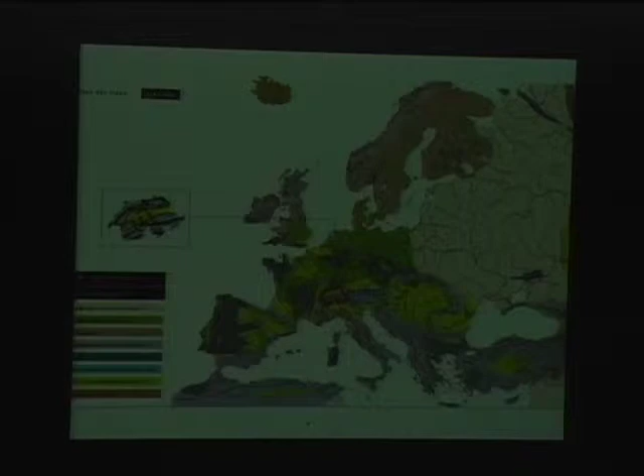In between is also a state of being for the Swiss and their landscape. Dorothee Imbert rightly referred to this in her introduction to the conference and exhibition on constructing the Swiss landscape here at the GSD last December. Switzerland, an island in Europe surrounded by a sea of recently united countries, embodies this condition. Within its borders, extreme contrasts of geology, geography, landscapes, history, culture, and traditions collide and exist within hyper-close proximity. This encounter of extremes, especially in the landscape, provides an obvious richness while heightening one's awareness and appreciation of the polarities.

Ours is an isolated yet mobile office. Its base is located in the Swiss Alps at an altitude of 3,000 feet in the parsonage of Rougemont, a small village of about 960 people, to which we feel proud to have added 3 more. As an antidote to this remoteness, we have developed a migratory pattern which in 6 hours travel places us in the center of Barcelona, Spain, a city of 3 million people.

We're a small satellite office, our outpost, used intermittently, allows us to follow our Spanish work. This large-scale commute, 4 to 6 times a year, also offers a geographical and cultural shift which inevitably catalyzes new thoughts and inspirations. These are our images of our rural Swiss studio and our urban Barcelona antenna.

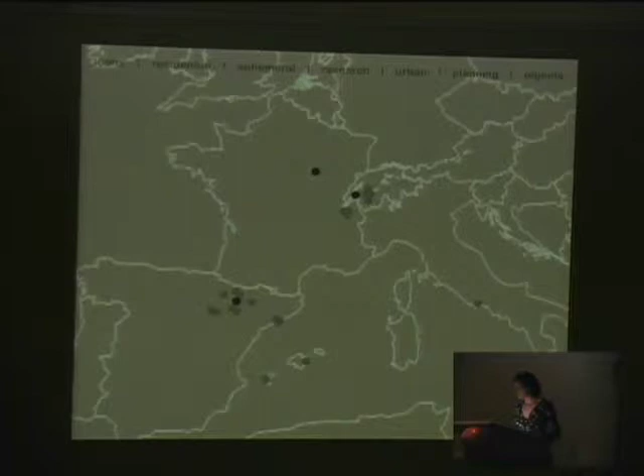These two projects bracket the dozen years we're talking about: the redesign of the ground plane of Corbusier's Unité d'Habitation on the left, done in collaboration with Bruno Reichlin, was at the beginning of our practice, and the interior renovation of the Château-d'Œx church on the right was inaugurated just two weeks ago.

One is a controversial 20th century modern emblem, the other a village church built on the ruins of an early medieval fortress. In both cases, we responded to a building which carries iconic status within a community because of the cultural, social, and emotional baggage associated with its presence, its use and reuse, as well as its symbolic value.

We will present the project of La Cité Radieuse in greater detail in the later part of this talk. Now I'll briefly describe the church, and this is the window I'll be referring to in the next slide.

The intervention in the Château-d'Œx church was sparked by the parish's initiative to invest in a new organ. The western part of the church, shown here before construction, needed to be modified in order to accommodate the height and weight of the new instrument.

This was an opportunity to improve certain spatial issues. The existing window in the western facade of the church, which we saw earlier from the outside, was entirely obliterated by the organ, which was backed up to it.

The back of the church was dark, and the three existing pillars impaired visibility. The connection between the two upper levels was rather ungraceful.

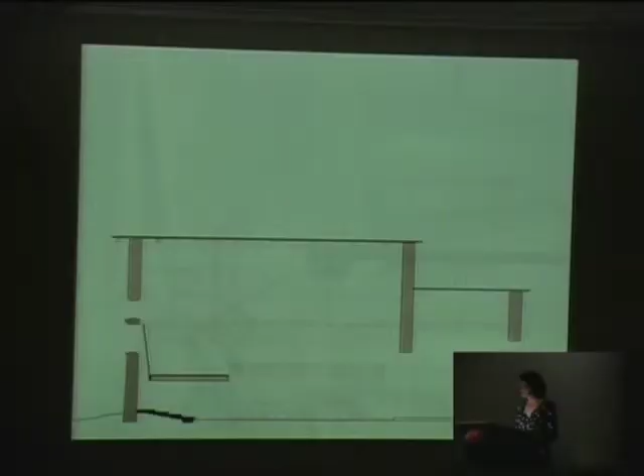Here's the section showing the light, the window and the inclined plane. Here are the stairs and the railing details.

The railing presents the most expressive face of the project. It sets up a dialogue between past and present, as it is inspired by the traditional craft of cut-out planks. The undulation of the surface gives a differentiated perspective depending on the point of view, sober or silent at times, and rippling or even sensual at others.

Residential. Over the years, we've undertaken more than 30 small-scale residential projects, single-family house or apartment renovations, as well as the design of private gardens.

Here we will show you one of our most recent residential gardens located along the lake edge near Geneva. This garden for a new house on the southern edge of Lake Léman was commissioned by the architect designing the house.

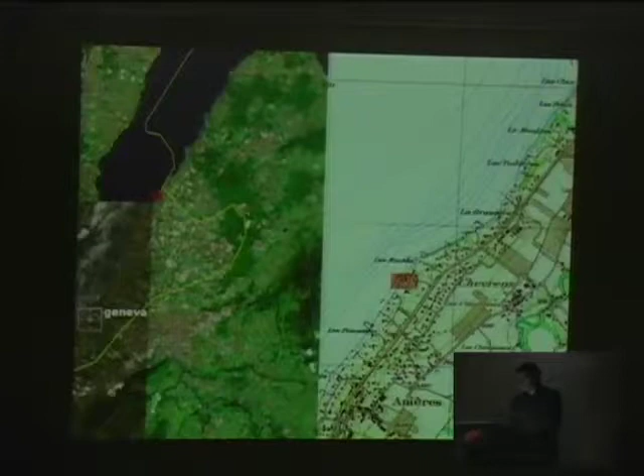She and her husband asked us to design a garden that would accompany her project and resolve some of the site-specific difficulties. The sloping site and the construction of a new house provide the topographic framework for this garden.

The garden responds to the quadrants that the house sets up. To the east, an orchard frames the entry drive.

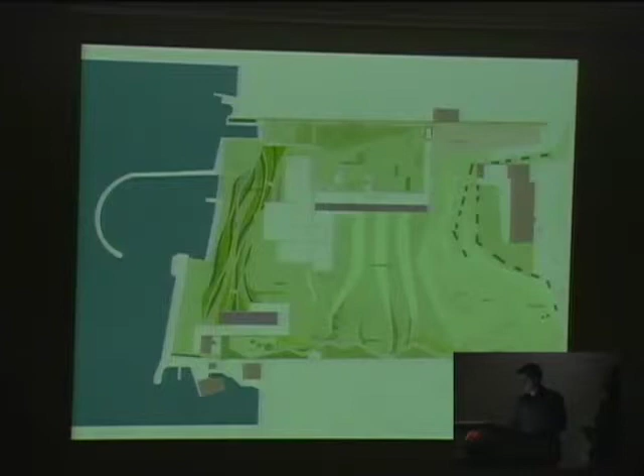To the north of the entry passage and reflecting pool, we designed a garden of drawers. To the south, a field of waves ties into a woodland edge, and between the house and lake, a planted slope. These different treatments of the ground plane in these four quadrants help to structure the garden.

Section A cuts through the drawer garden and cantilevered end of the house. The drawers relate to the more private rooms of the house. Section B cuts through the orchard, field of waves, and swimming pool.

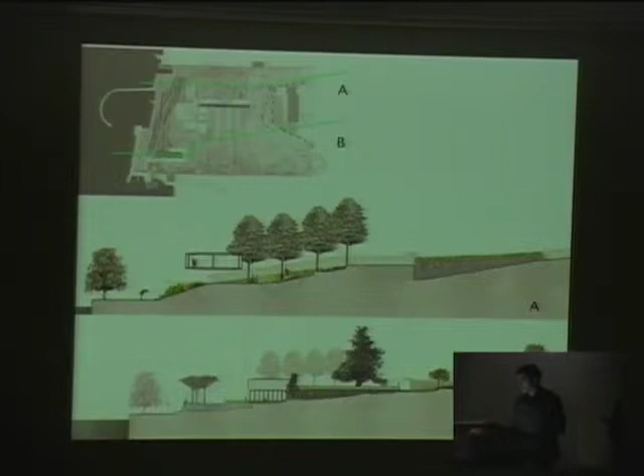The orchard on the highest edge of the garden is composed of a variety of antique apple species. This mass helps screen the neighboring house and operates as an entry percolator to the field of waves.

A square slope is enclosed by the house's cantilever, an entry bridge, and an existing line of linden trees. Seven large corten steel drawers are inserted into this green bank as plant containers. They're filled with aromatics, ferns, and large leaf perennials.

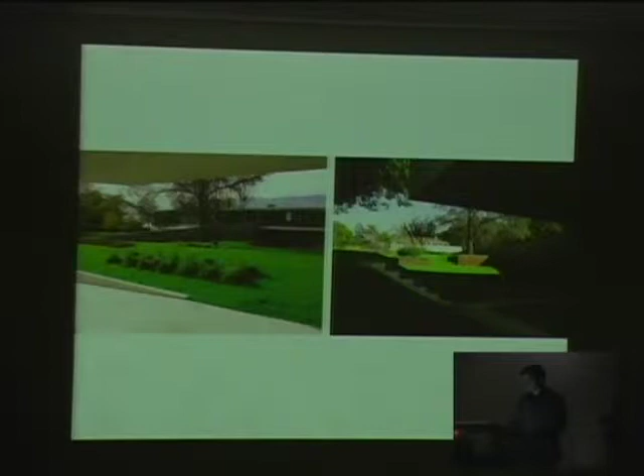The field of waves extends up from the kitchen terrace to the orchard, undulating along the neck of the house. The water's edge acts as a starting plane of a series of successive vegetative undulations which roll up the slope, flatten out around the house, and then continue along the site.

This heavily planted slope along the lake poses as the garden's primary formal piece. Ironically, it falls away from the house and is best seen from the water.

As in many classical French gardens found in the French-speaking world, the primary vegetative structure is composed of boxwood hedges. We've added a twist: grassy striations fill the voids of this boxwood fabric, and an assemblage of paths and linking stairs offer access to and from the lake.

The stabilized gravel paths slip between the ornamental grasses and the boxwood striations, while also allowing for easier access to the lake edge. Two pines were added to an existing one in order to help filter the reflecting sun as it sets across the lake.

The result is a contrast between the sober rectilinear geometry of the house placed within another new formal language, that of the water, the earth, and the plants.

Ephemeral work. We enjoy working on ephemeral installations, partly because it allows us to explore the margins between fields that we're interested in. We will overview two pieces, Garden of Silence and Field of 100 Pickets.

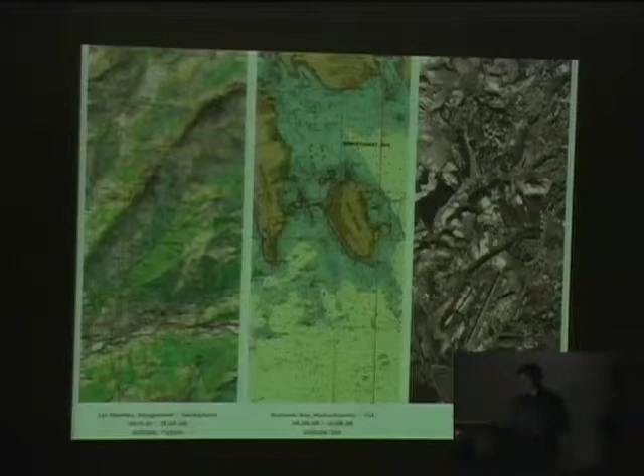Outside Rome. During a year at the American Academy in Rome, I studied the landscape of post-war collective housing projects built on the Roman periphery. In search of space, light, air, and low land costs, Rome's post-war collective housing projects were pushed far away from the center and into the broad threshold between the historic city and the agricultural countryside.

The relationship of the dwelling to its urban condition, to society, and to the land changed radically in this new marginal situation. Although new housing typologies ensued from extensive experimentation, their subsequent landscapes remain remarkably understudied and undesigned.

Neither public nor private, neither park, square, nor garden, ambiguity has left many of these residual spaces unappropriated and lost. Still commonly lacking a resolution of vision, program, ownership, and identification, the landscape of housing in peripheral Rome demands greater attention.

Terragrams, Delivering the Landscape. Terragram presents a series of interviews that open dialogue on the integral and all too often invisible role that landscape architecture plays in our lives. A first-hand conversation with the people who are making, designing, and thinking about our constructed landscapes.

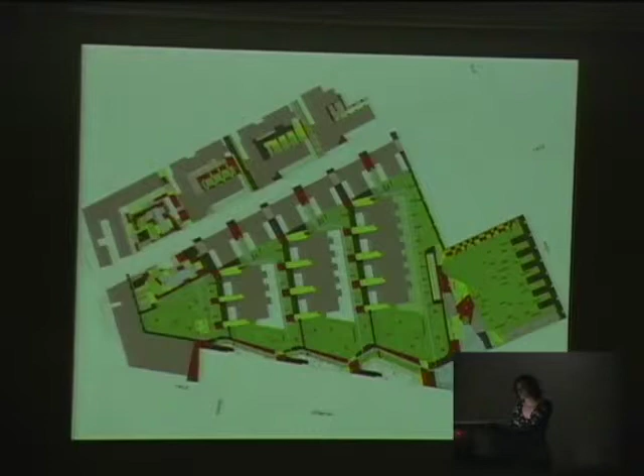To the east, we were able to preserve a pre-existing grove of trees, which now stands slightly raised above a hedge garden. This is the main entrance from the city. Finally, an interstitial terrain is sculpted into green terraces and terminates in a bosque of almond trees.

These earth forms make reference to the local agrarian tradition of lightly leveling fields to facilitate pasture, planting, and irrigation.

The different zones created by this terracing reinforce the zigzag path and frame the children's play spaces, while also shifting the concentration of activity away from the attached houses. The hills, which are as high as 8 feet, allow for multiple perspectives and greater spatial definition to this zone.

These landforms extend the effect of the volumetric stepping down, which we can see in the massing of the housing, denser and higher in the rear of the image and lower in the midground. Between the zigzag path and the row houses, the grass terraces create a modulated landscape, a solid rather than a void in terms of spatial identity, inscribing it as one of the park's most identifiable parts.

We also can see the end of the passageways that feed the row houses. All houses are served by a common underground garage. The passages, therefore, allow mostly pedestrian access between the main entries to the left and the garden entries to the right. This space is intended to be appropriated by its inhabitants.

Each passage has a line of trees of a different species. The colored bands on the street correspond with collective entrances and small sitting zones. We insisted upon qualifying the garden entrance as though it might be used regularly.

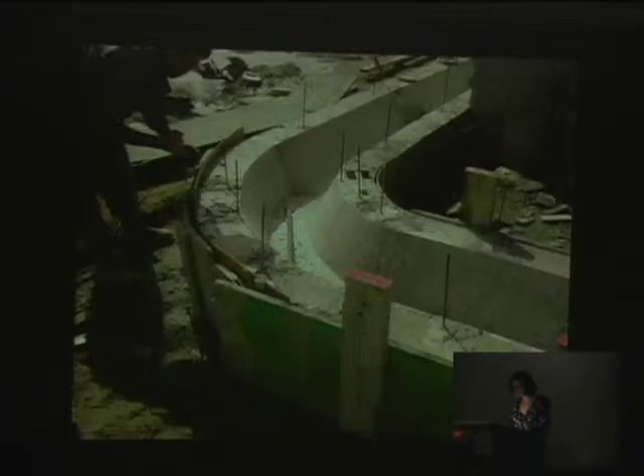The canal system was designed to be composed of prefabricated concrete modules, but in the end it was decided to have it poured in place. The final quality is not perfect, but satisfactory given the park's construction budget.

At three of the four sources, we have designed simple boxes to serve as fountains. They are made of Corten steel.

Completing the system, here's the basin which anchors the park at the main plaza. The bottom of the basin is filled with river stones and a few sunken planting circles for water lilies. The edge becomes a place to sit. The water is also used to irrigate the garden.

At night, light boxes illuminate the outer edge of the park and basin, thus bringing some life to the imposed perimeter wall separating the park from the school.

At the heart of the park, three elements come together: the basin, the plaza, and the bosque of pre-existing ailanthus trees. This zone becomes the threshold between the hedge garden and the zigzag path, which reaches into the park's interior.

Along the rear wall of the park are short segments painted red. Here, despite the client's reluctance, we sited doors which were to be punctured into the schoolyard. Regularly disregarded during the design and construction process, we're happy to notice that they have now been constructed.

And these doors are now gateways to roundabout detours for the children as they walk from one class period to the next.

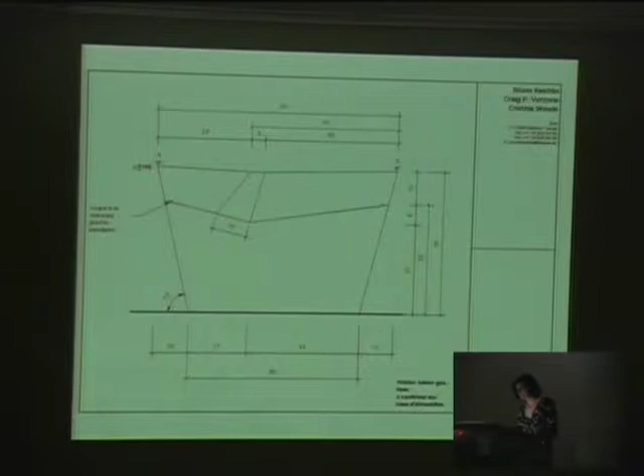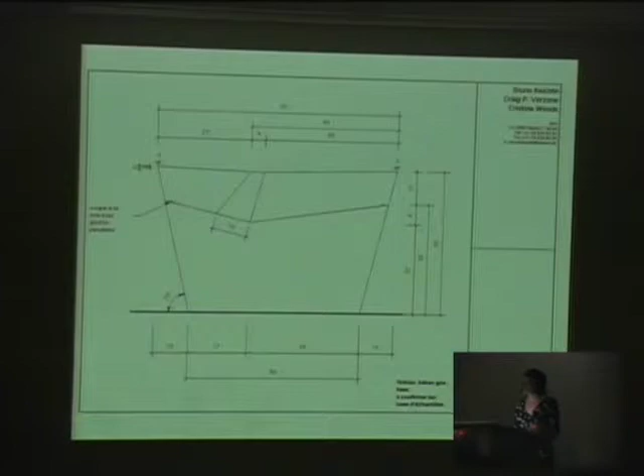The Cité bench. Finally, this concrete bench was designed for the Cité project. It's based on Le Corbusier's Modulor, and its design allows for double-sided yet oriented use, since the slots are not centered, and this makes the depth and inclination of the seat perceptibly different on either side. The slots allow for water to drain from above and for indirect light to shine through from below, when the bench is combined with a floor projector.

The benches can be installed individually or as a series of increments. After the Cité project was realized, the Barcelona company Escofet decided to commercialize it.

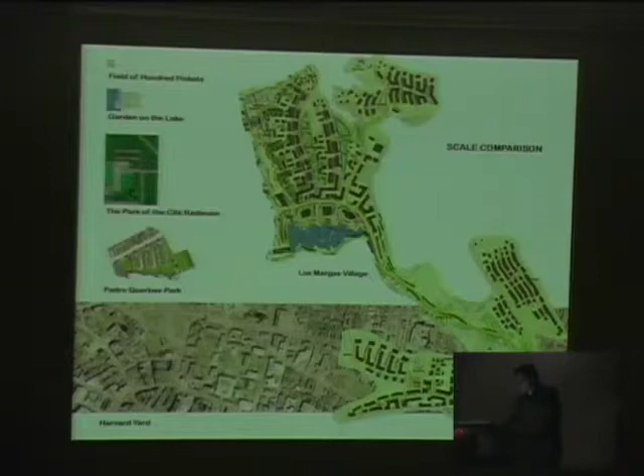And this brings us to the end of the flyover. The diversity of scales at which we practice is one of the fundamental flaws of our studio, if one thinks purely in terms of efficiency. However, it's one of the reasons why we enjoy our practice, and we find it keeps our minds nimbler. So we accept it as a chosen flaw, of which there are quite a few.

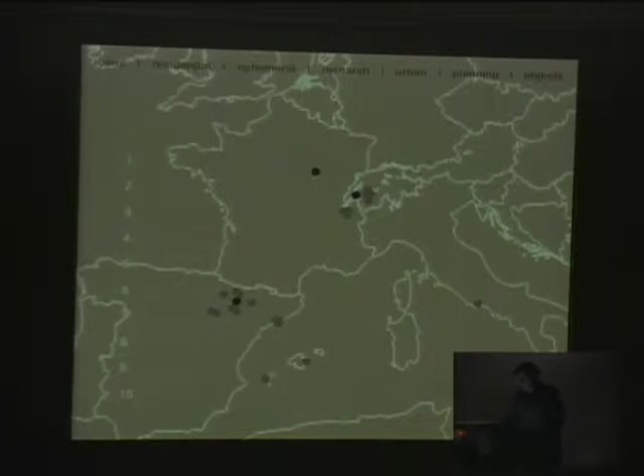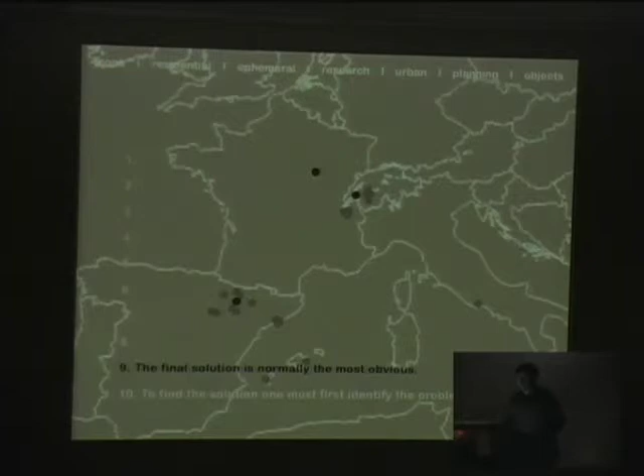Before delving into 3 projects in greater detail, we'd like to submit to you a few thoughts. So here are our top 10. To find the solution, one must first identify the problem. The final solution is normally the most obvious. The most beautiful ideas are the unexpected ones. Number 7, fine craftsmanship is nice, but not necessary.

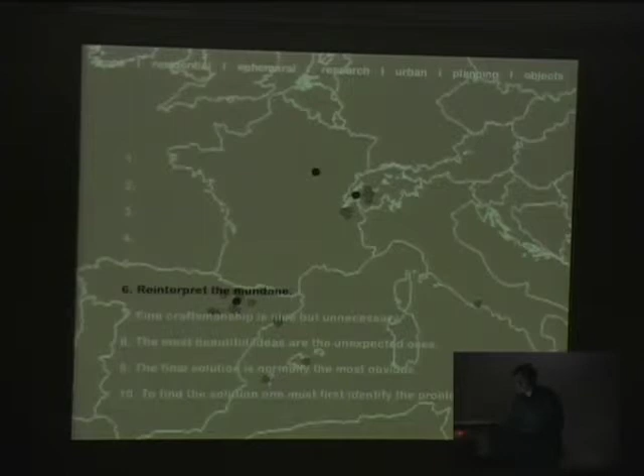Reinterpret the mundane, design between abstract and figuration, start with the ground plane. Coming in at number 3, a plan is meaningless without its details. Landscape and architecture are reciprocal pursuits. And finally, number 1 of the VW Top 10, practice is trial and error.

But as in much of what we do, we could not just stick to 10, so here are a couple extras. 11, every project needs an inside advocate. 12, choose your battles. And finally, 13, there's only so much you can do from a distance.

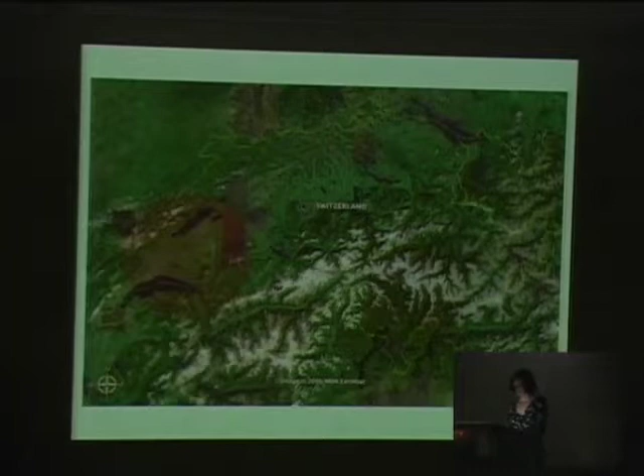Okay, now we'll show you Cadrage, a landscape master plan for the Canton of Vaud, Switzerland. Switzerland is composed of 23 cantons. The Canton of Vaud lies in the western French-speaking region. It borders the Canton of Geneva, France, and the cantons of Neuchâtel, Fribourg, Berne, and Valais. It presents a sampling of the 3 main geomorphological components of the country: the Jura mountain range to the west, the Moyen Pays or plateau in the center, and the Alps to the east.

The canton is in the process of revising its master plan and decided for the first time to commission a landscape study focused on the territory's rural landscape, embracing close to 3,000 square kilometers and a range in altitude of almost 3,000 meters. We put together and piloted a team composed of a historian, a geographer, an agronomist, another landscape architect, a photographer, the graphic designers at Actar, and our office. The purpose of the study was to assess the current state and diversity of landscapes and to anticipate the major issues confronting the evolution of the landscape in the next generation. The final report was structured into 4 booklets, which could be velcroed into a sleeve in 2 different ways.

This diagram of the report shows the various parts of the study. We'll go over them part by part.

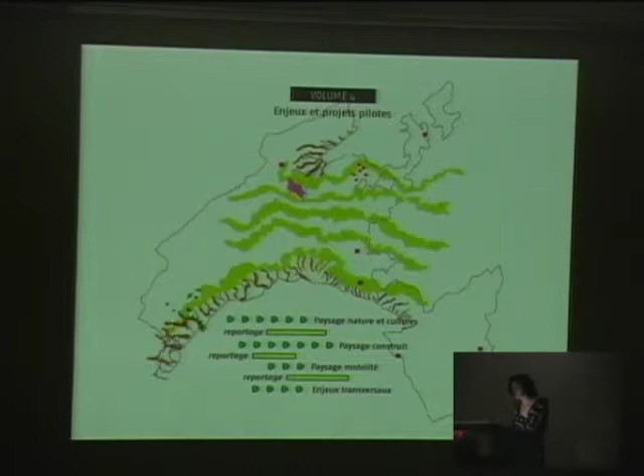Drifting across the territory, collecting first-hand observations, and the identification of 24 landscapes of reference in Volume 1. The creation of a palette of landscape typologies in Volume 2. Volume 3 presents and carries a DVD of films made by the photographer. And all of these led to Volume 4, identifying the challenges of the future and addressing them through some pilot projects. These 4 volumes cross-reference one another and are meant to be used in conjunction, hence the binding concept, which allows all 4 to open up at once.

Volume 1, Existing Conditions. So as to highlight the evolution, or lack thereof in certain cases, the photographer collected old postcards from the early 20th century and returned to the same spots to get the identical point of view. Here's another example.

Then, drifting. This shows the route of our team's drifting and gathering process. We gave a 12-year-old the task of mapping out roads of varying typologies from highways down to unpaved lanes, and of determining our stops randomly every 10 kilometers at these locations. We collected information.

Photographic panoramas as well as collective sketches. These were created by layering onto the same drawing the components of the landscape, topography, water, buildings, and vegetation, captured in sequence by different people, an exquisite corpse of sorts. I owe this idea to Carol Bolsay, who taught me so much at the Carpenter Center and at the GSD many years ago.

These sketches are shown here, interjected between the photographic documentation, and the contrast between what the camera captures and what eyes and hands record is at times quite poignant.

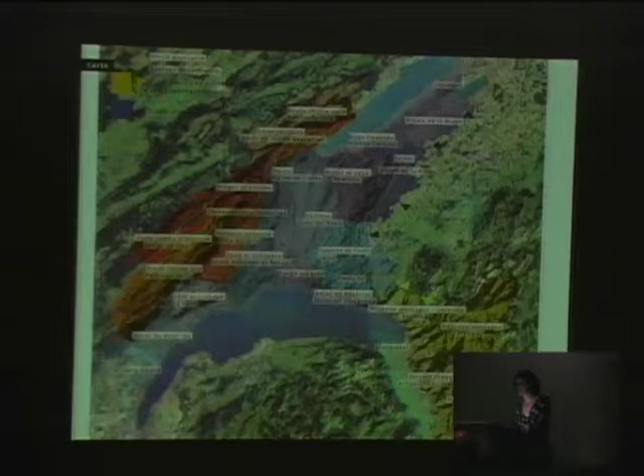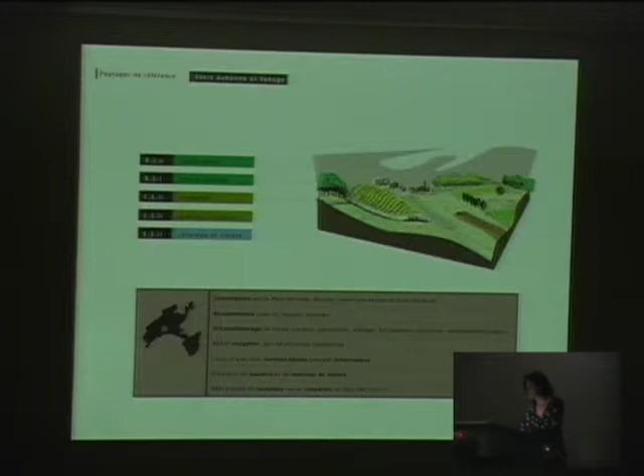Each landscape of reference was presented as follows: a diagram cross-referencing to the palette of typologies relative to its components, a locator map and a list of salient characteristics of this specific landscape, then a representative image and some of those collective sketches, some more images, and a text by the historian about how this landscape came to be, and by the agronomist about how it is currently managed. Finally, an ideogram summarized in a more interpretive manner the qualities of this specific landscape.

Here is a second example in the Jura region, just to give you a sense. And there are 24 of these.

Volume 2, Landscape Typologies. This shows the organization and color coding of the palette of landscape typologies by classification into 7 deliberately non-scientific categories: rock, water, grasslands, trees, agriculture, human habitation, and infrastructure.

The identification of the typologies was done from a purely empirical point of view, avoiding professional jargon from any field as much as possible. It's based on the observation of the aerial photograph and the ability for non-specialists to discern the type of landscape in question at a scale of 1 to 10,000, since each image represents a 1 kilometer square.

At the center, the extracted aerial image. To its left, a doctored image, graphically highlighting its essence. To its right, a probable locator icon, the title and main characteristics of the type relative to fauna and flora, water, constructions, infrastructure, and uses. And finally, the code and name of the type.

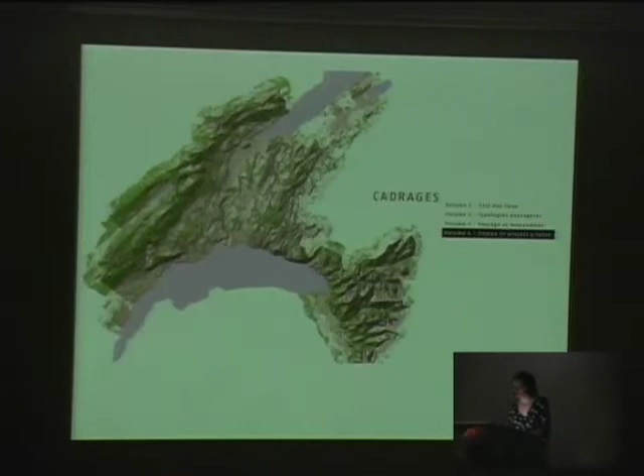This brings us to Volume 4, which focused on issues and pilot projects. Here's a preliminary mapping of the landscape issues we addressed.

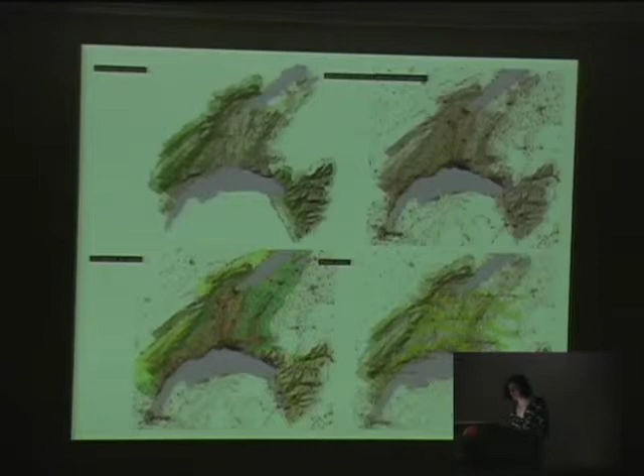Here's an example of those questions which serve as springboards to pilot projects. What if the rural landscape remained open and diverse? Encourage transversal swaths across the plateau. What if the lake edge landscapes remained connected to their backcountry? Maintain landscape swaths so as to frame urban development.

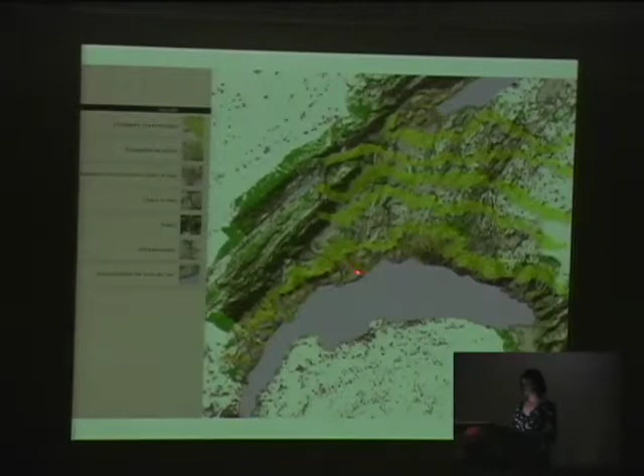This shows the transversal swaths in yellow across the plateau and the smaller scale lake edge ones in orange on the Lake Léman to the south and Lac de Neuchâtel to the north. The process by which we identified the strategy includes, on the left, locating the existing villages and threading a swath in yellow across the more open areas. On the right, deducing the areas where densification through urbanization or reforestation is favored.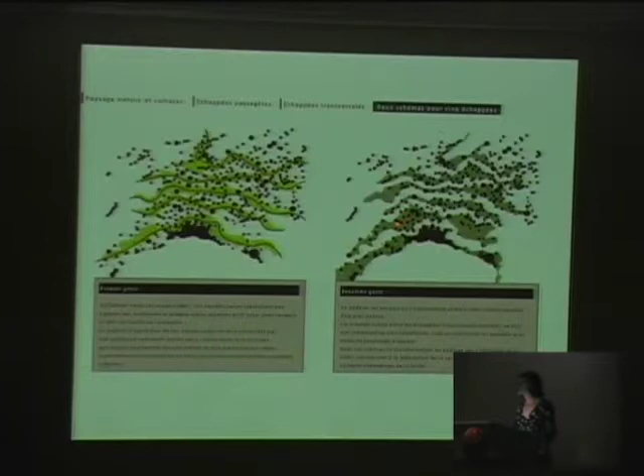To consider the implementation of this planning strategy, we studied this test patch, highlighting the critical components which impact the process or become primary actors in perpetuating the openness and vitality of the landscape swath: villages, orchards, isolated farms, road and rail lines, bridges, paths, waterways, wetlands, forest patches, etc.

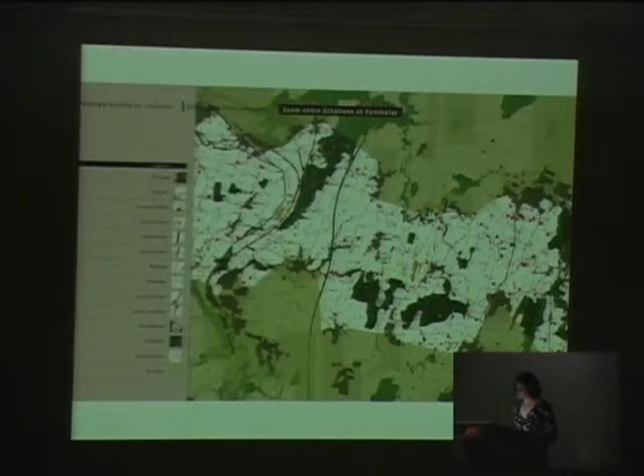For the lake edge swaths, we proposed a 4-part strategy, which includes protecting the primary landscape components, restitching the pedestrian connections, articulating the edges, and densifying development around the swath.

What if 2 separate but adjacent towns coordinated their growth? Qualify the meeting ground of their peripheries through landscape intervention and urbanization of different densities. The growth of 2 towns, Orbe and Chavornay, only a couple of kilometers apart, was studied, proposing a strategy of expansion as well as the preservation of some agricultural land of different types—orchards, vineyards, peri-urban agriculture, greenhouses, etc.—and wetlands to become the structuring open spaces of the future conurbation.

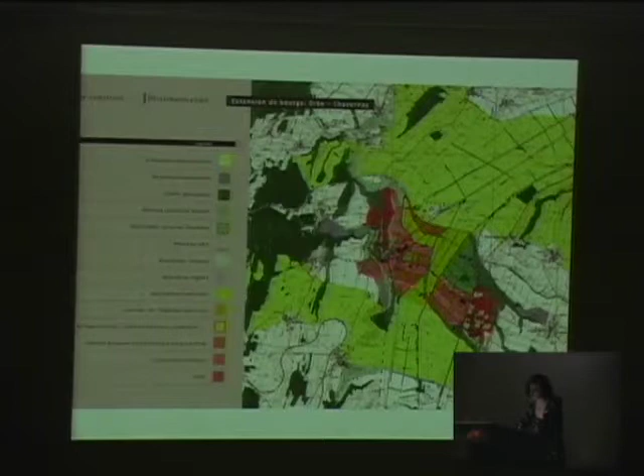What if a traditional village needed to grow? Create new housing without destroying the transition to the surrounding countryside. Here we proposed a series of strategies to densify and extend small villages while also attending to the distinct landscape qualities of the encounter between village and countryside.

Identifying the existing anchor points or elements which structure the edge—buildings, intersections, vegetation. Suggesting anchor points where they're missing. Conserving important openings from the village into the landscape and vice versa. Proposing the reinforcement of typical transitional landscapes—community gardens, orchards, etc. Proposing a variety of densification and construction strategies to avoid sprawl.

What if we couldn't waste our land? Found new dense villages connected to public transportation rather than allowing existing peripheries to sprawl. We proposed a revolutionary idea with regard to Swiss mentality: the creation of a town from scratch, with no historical precedent—just the selection of a site based on its landscape qualities and its location potential. This was heresy to the Swiss.

These are high-density new centralities which continue the pattern of small, dense nuclei. We found 10 potential sites for these new towns. Here are a couple of examples.

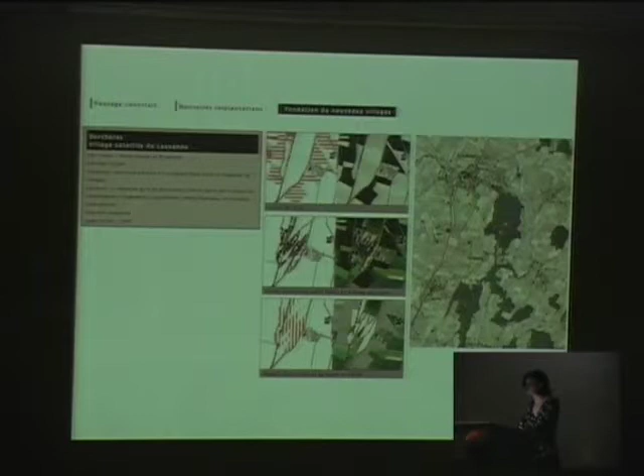What if our highways were beautiful? Consider them as parkways. Our pilot project addressed the first highway built in Switzerland in 1964 along the northern edge of Lake Léman for the International Expo, which took place in Lausanne. This road traverses exceptionally beautiful landscapes, but it ignores its immediate landscape, or at times, in an attempt to make itself more discreet, it devalues its potential as an important piece, both as a part of and in the apprehension of the larger scenery.

What if we encouraged sustainable projects on agricultural land? What if indigenous energy were cheaper than imported energy? What if renewable energy production facilities became attractions? Link renewable energy, tourism, and agriculture by making them mutually supportive. A local farm with solar fields sells its products directly and joins a small-scale camping network.

The production of energy is not considered an agricultural activity in Switzerland, or hasn't been up until now, so it was forbidden on agricultural land. But that law has just been changed, so we're happy to find that out. A combination of wind farming, existing and new leisure activities, and the reuse of a military fort.

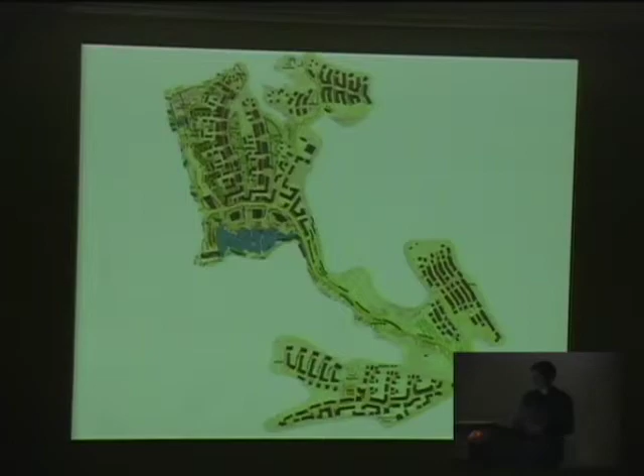Zooming in on the project, we see the first phases of construction with a hotel, restaurant, and clubhouse to the lower right, and the first 2 fingers of housing in the center.

One approaches the village via the entry road, situated on the upper right. The entry road is paralleled by 2 pedestrian paths. These paths converge and the promenade widens to interlace 4 water reservoirs on the right of the image. The reservoirs help situate the hotel and clubhouse.

On the opposite side of the entry road, the housing blocks branch out along 3 roads. Between these blocks will be 2 terraced fingers of park, which fall down to the north, opening up views to the Pyrenees, to the left of this image.

In between the golf course and the housing, we've tried weaving in the continuation of the public promenade, which wraps the lakes. In addition, parking, a public sports complex, and a swimming pool will be interlaced. Within this promenade, a series of 4 small meeting spaces, or plazas, penetrate the outer edge of housing and close the connection towards the 2 terraced fingers.

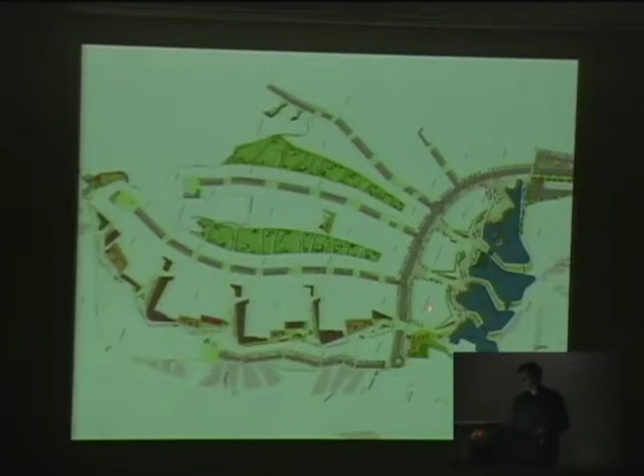Here the plan highlights our first phase of public space construction and more clearly shows the roads, the water reservoirs, the promenade along the reservoirs, the promenade along the edge of the housing, and the green fingers.

With the plan rotated 90 degrees with north now oriented up, I'd like to walk you along the edges of the reservoirs. They're the principal organs of the place. The hydrologic infrastructure becomes the spatial framework to the public realm. The reservoirs are bound by paths, stairs, and ramps. The parcels in white will eventually be occupied by 3 unknown, multivalent socio-cultural commercial buildings.

We were confronted with 3 problems. How do we resolve the need to retain 1/3 the necessary volume of water for site irrigation, remembering that there's a golf course on the south side? How do we create a cohesive structure for the public space, which must drop 40 feet transversely from east to west, while also including flexibility for these 3 unknown parcels of land? And finally, perhaps most importantly, how do we invent an identity for this new greenfield village, working within a space squeezed between a landscape of housing and one of leisure, golf, and mostly detached from its geographic context?

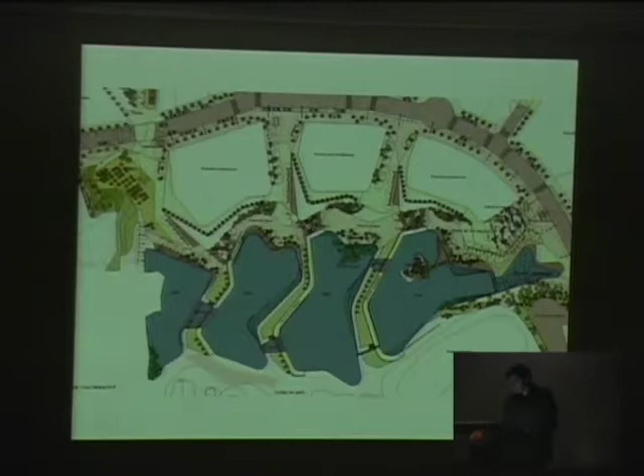We looked at the Badlands, which enveloped the site, to begin developing a language of spatial complexity for our lake edges, ground planes, and paths.

Topographically, we finally performed a simple cut and fill in order to move the least amount of earth while at the same time making the deepest pockets of water. The promenade wraps each lake to stitch them into the park network. The reservoirs are variations of one another, which have been slipped in order to diversify the spatial qualities of the edge conditions.

Sectionally, these layers are stacked up to mitigate the height differences of the site.

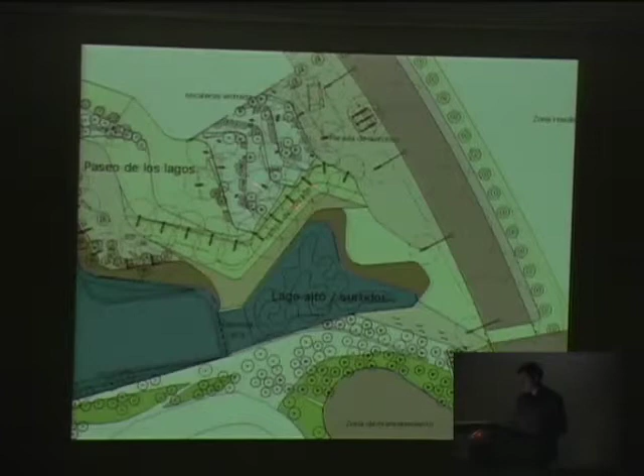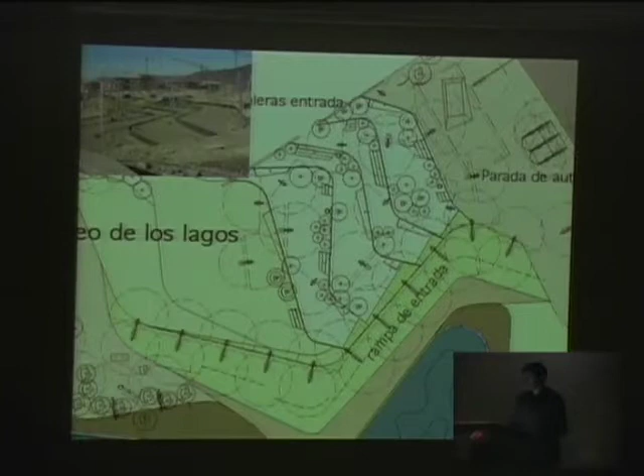At the upper end of the water sequence, a source of water marks the head and widening of our principal promenade from the entry road and linear park. This water source, together with a small open-air theater, flank a long ramp, thus defining the urban aperture into the park network. The stacked Corten steel risers frame small stabilized gravel terraces which get populated by cypress trees and the project's modular tube lamps. The ramp provides handicap accessibility to the lake edges as well as to the terraces.

Two different Corten steel step typologies are infilled with concrete to provide access between the platforms. Like many of the other elements of the park system, they were repeated and mutated. This is what makes it efficient.

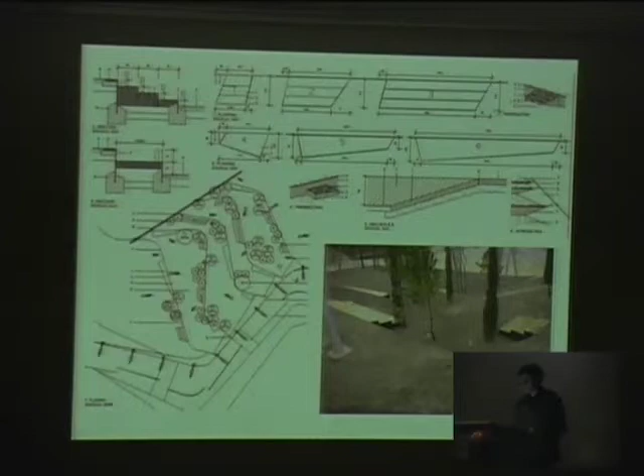Here are a few images of the theater and access slope into the landscape surrounding the reservoirs.

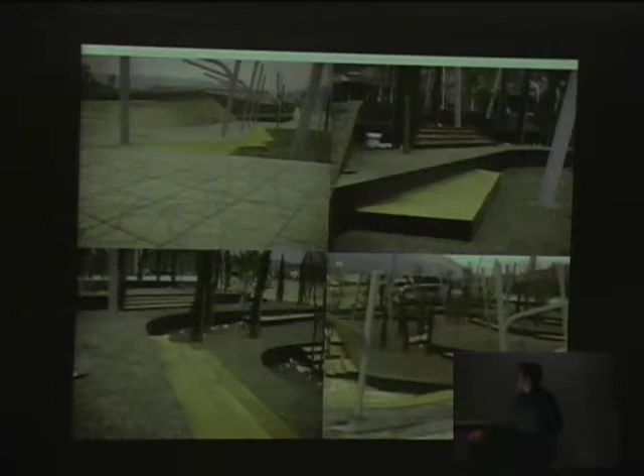The transition between the reservoirs repeat themselves while also mutating to their specific conditions. 10 feet of elevation separate each edge of the basins of water, and it is this seam which becomes the most valuable vertical and horizontal intersection in the project.

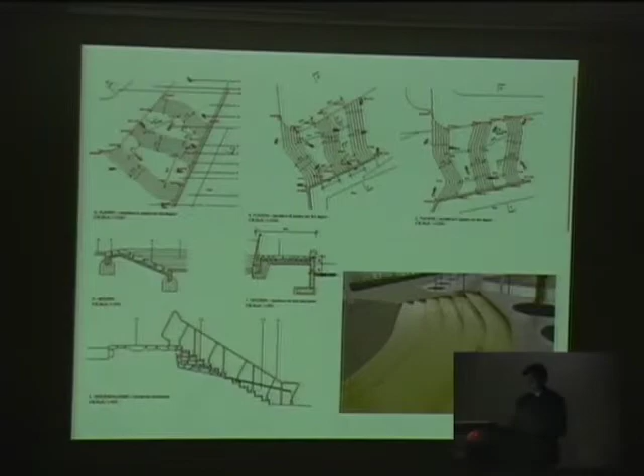Here we have the intersection of the promenade, stairs, and lake. The construction plans on top of this image show the three mutations of this transition between the lake levels. The stepping handrail on the bottom left is perhaps an example of designing between figuration and abstraction.

And again, here's one of the four transitions between the reservoirs.

We tried taking advantage of the possibilities of having these large bodies of water and all of this water edge in the project. On the left, a bent dock extends over the water. In the center, a cascade between this dock and an island; on the right, a cascade joins the two lakes. And the island itself punctuates one of the lakes, which is 15 to 20 feet deep.

Below left is a drawing of a large Pyrenean hydraulic control point, and to the right is an existing set of cascades built recently to manage the seasonal surges of a nearby torrent.

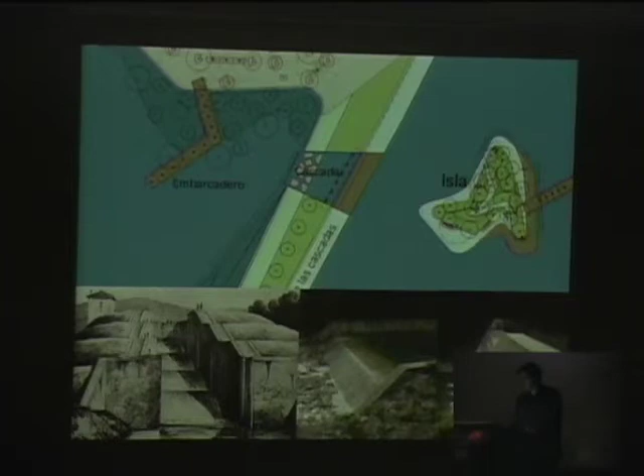Set into lakes are zones for aquatic plants and trees. A boardwalk crosses through the zone of taxodium trees to bring one out on top of the body of water. The hotel in the background is superimposed atop a clubhouse, which is buried and integrated into the terrain.

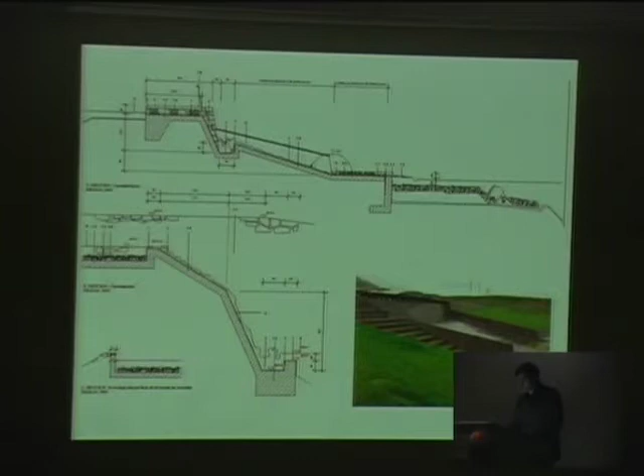These sections are cut through the cascades, which allow the water to flow from one reservoir to the next. The cascades will be sheathed in an open skin of steel platelets, hopefully, in order to aerate the water as it passes between the two cisterns.

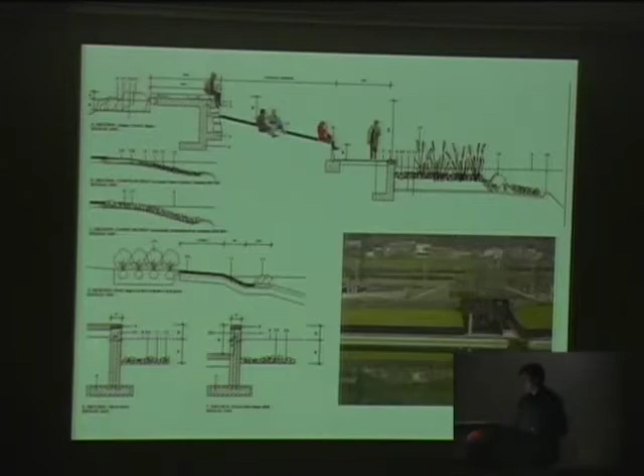The dikes are composed of four components: a lower path, an inclined Corten steel border, a gentle slope of grass, and a low stone retention wall and upper path. The upper path of the dike, the grassy slope.

When viewed frontally, especially during the construction process, the layers became stacked. In perspective, the horizontal planes are layered.

The transversal paths extend the full length of the reservoirs and all originate from the principal promenade. The intersection between the transversal path and promenade open up to make the small plazas.

For the principal promenade, we've designed a prefabricated concrete paver. It is a simple square paver with 5 lines traced across the surface. When rotated randomly, the individual paver disappears as the lines on the adjacent pavers interconnect to create a larger pattern of random scribbles.

Particular places in the water edge park include an island, which overlooks the upper lake, and a bent dock which slips through a grove of Taxodium trees and hovers just slightly above the water.

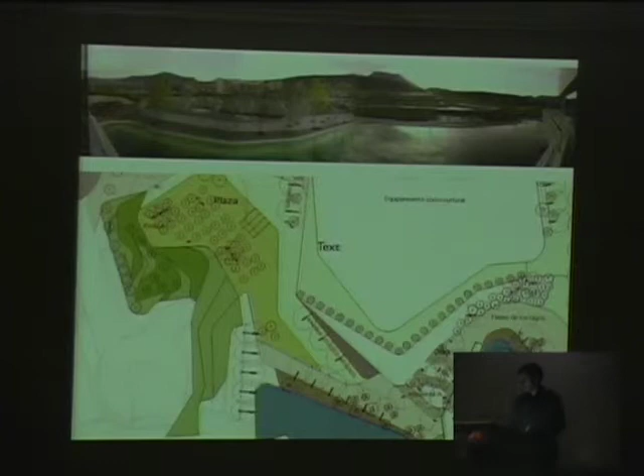This is the joint between the hotel, restaurant, clubhouse, the multivalent parcels, and the promenade which continues north along the edge of the housing. Here we see the full composition of reservoirs, promenade, hotel, and housing.

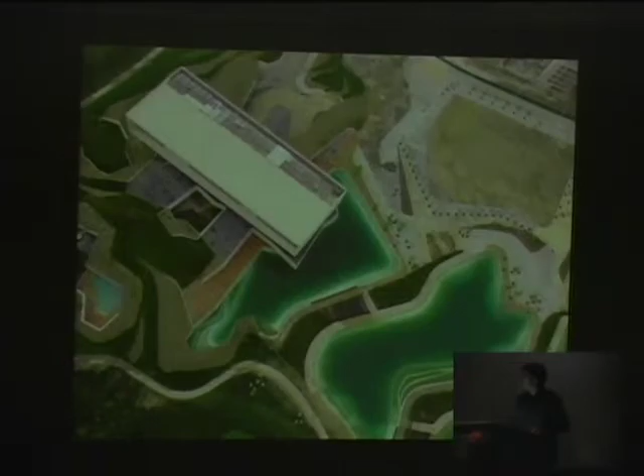Floating within the fabric of our long path are these polyvalent parcels. Not knowing what they would become, it was a challenge designing around them.

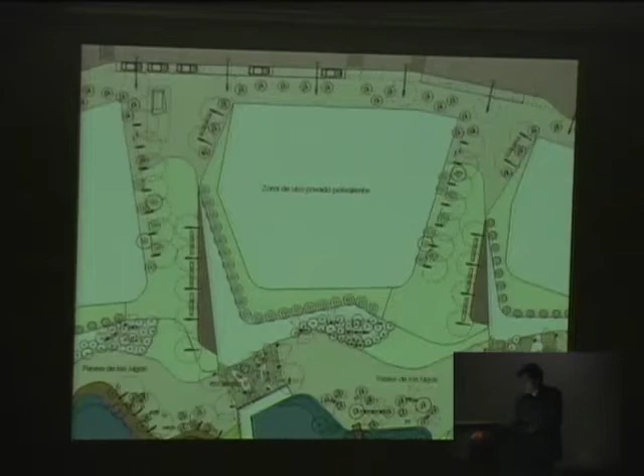The passages between these parcels lead to the elongated residential blocks and the green fingers between them. The red dashed lines correspond to the pedestrian passages under the buildings and through the outer layer of the residential block.

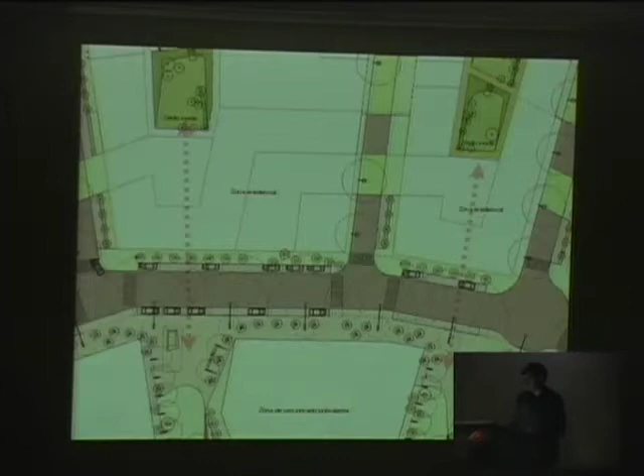Note how the buildings densify along the edge of the entry road. They span the streets and are opened at the ground plane to the finger parks.

Before I continue talking about the promenade, let's look briefly at the green fingers which rest inside and between the residential blocks. As they are oriented to the north, they bring in and open up the views to the Pyrenees for the houses. Our intention here was to retain some of the pre-existing qualities of the site, its openness and

topographic stratification. Looking back on the village from the north, we can see the residential spines.

The green fingers are modulated or broken up in a similar fashion as housing is. We wanted them to be porous. Cross-circulation was a vital component, as was circulation along the privatized edges. Little planting is done in order to preserve the views from the houses to the Pyrenees.

Small puddles of concrete are dripped onto the green fingers. They're peppered with our prototypical picnic table that we saw in the park in Huesca in one condition, and a wooden bench and stone plinth in another condition.

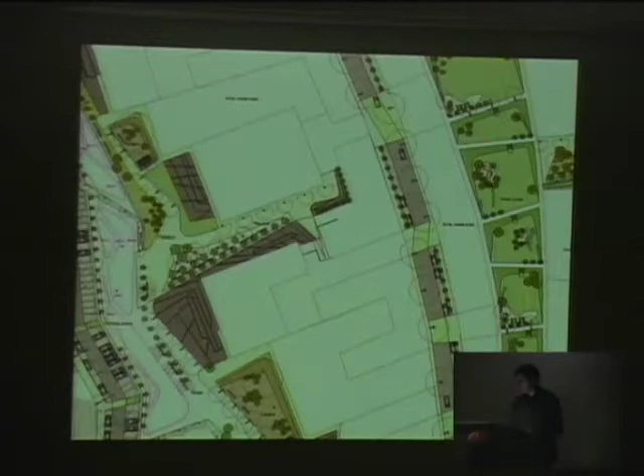A few sketches indicate organizational strategy of the outer edge, promenade and finger parks. Zooming out, we see the relationship between the 3 internal streets and 2 green finger parks. Tying these north-south axes to the western edge are a series of 4 small pocket park composites.

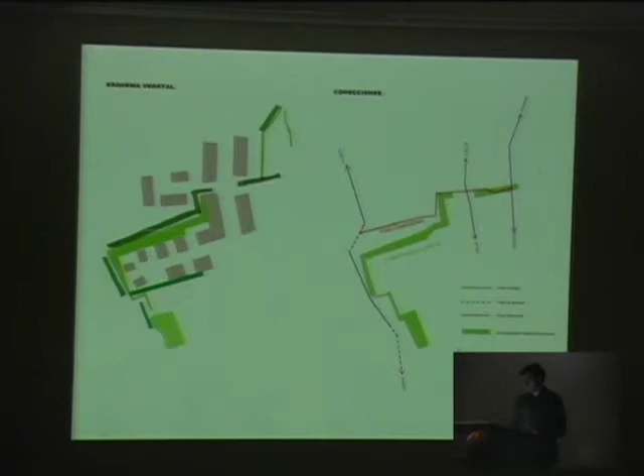Before working on the mutations, we developed the prototype. On the left, vegetal scheme. On the right, pedestrian connections. The planting strategy. And finally, the vegetational volume and character.

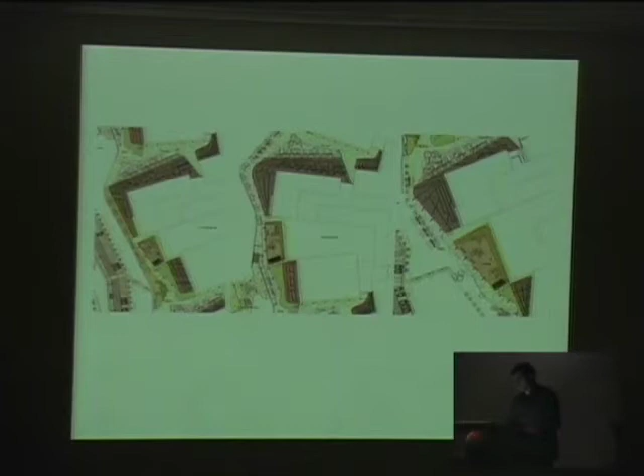These pocket park composites consist of a small plaza and tree grove, masses of ornamental grasses and perennials, a children's playground, and a small lawn. These are serial in nature and repeat themselves along our path. Here are 3 of the 4 iterations.

They're structured vertically by a repetition of our modular tube lights. Which brings us to the project's lighting. Early in the development process, we became rather preoccupied with lighting.

Unsatisfied with what was in the market, we figured we could design a fixture for the project. Our intention was to keep it simple and cheap. For our first fixture, we used a 16-centimeter square steel tube and called it the Badlands A lamp.

When we learned that the Badlands A would save money on the project because of its low cost, we figured the developer would agree to an angled version, Badlands B. This approach led to 2 more iterations.

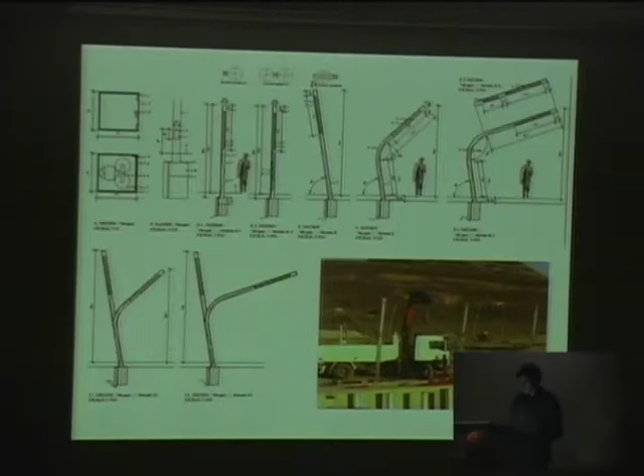We imagined applying simple operations to our Badlands A. We cut, we welded them, giving us Badlands C, D, and E, with variations to lamps A and D, giving us A2 and D2. Here are models A through D.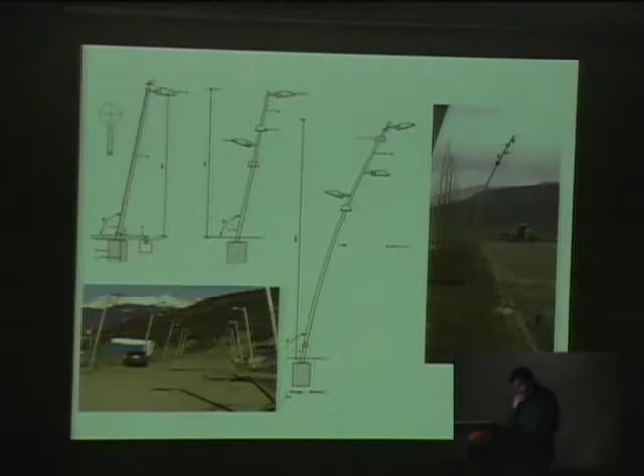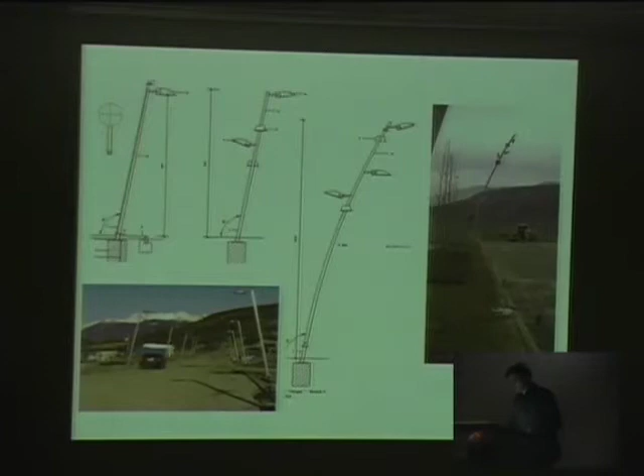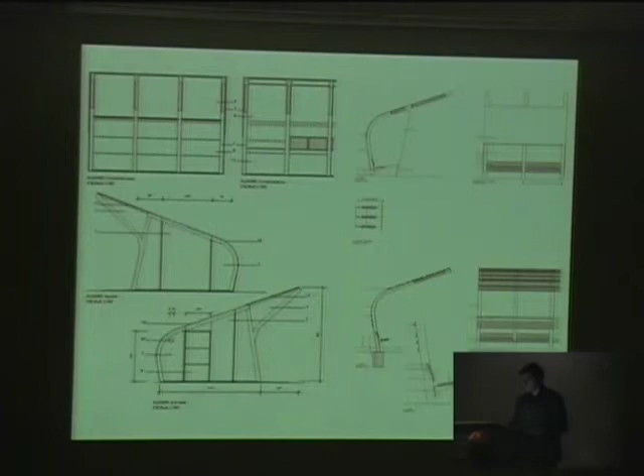And finally we added G and H for the linear park and entry road. However, the steel tubes came in structurally handy in helping us design a cafe, bus stop, and shade structure. Here's the shade structure that weaves its bench component.

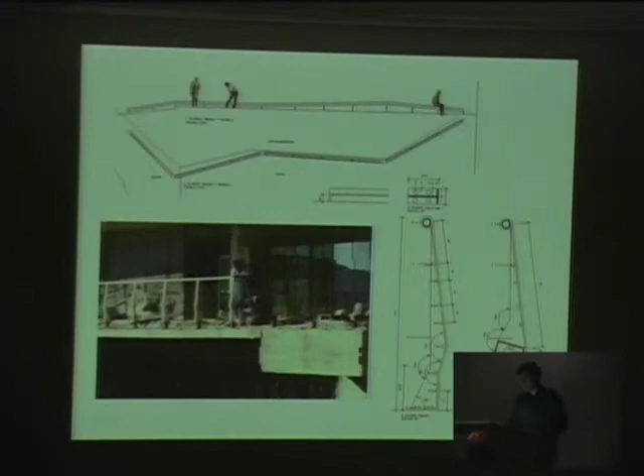Then we used a Badlands 16cm tube to help us bring some low-level lighting to the terraces of the restaurant and hotel. These bent Badlands lamps then contaminated our handrail detail to the right, thus allowing us to avoid any redundant systems while saving money on supports and space. Here we see the handrail of the hotel which wraps around the balconies and originates along the edge of the lakes.

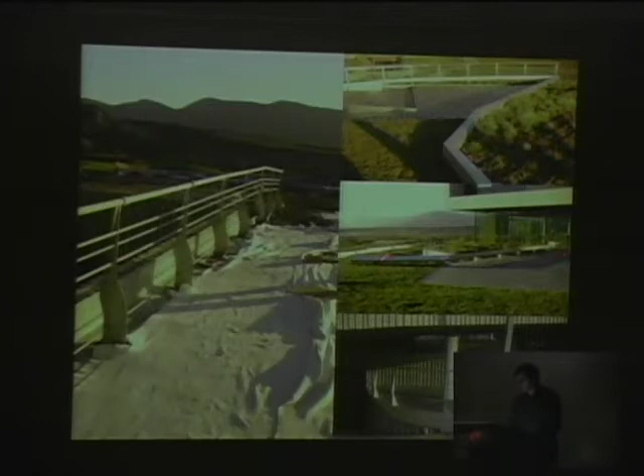On the left, the bulging foot is waiting for its corresponding light tube, and on the right, a few variations of the light tube and handrail. I'll zoom out to show you the first phases of construction. The central village will be complete in 3 years, and the others perhaps within the next decade or two.

This is the last project we'll show you. Well, almost there. In 1996, the city of Briey asked Bruno Reichlin and ourselves to study the ground plane at the Cité Radieuse in Briey-en-Forêt, France, Le Corbusier's unité d'habitation.

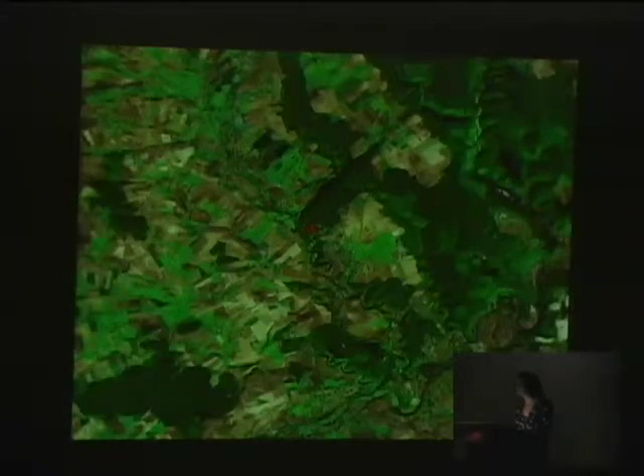The housing bar is sited on the upper plateau of a river valley in a clearing looming high above a mature stand of European beech trees. It's an exceptional site.

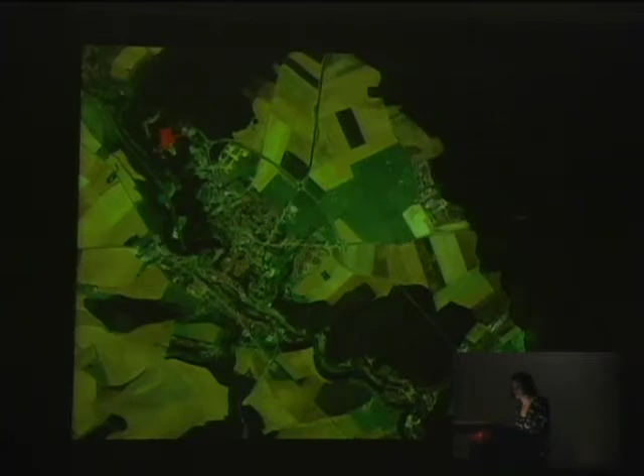This is the last version of the site plan which came out of Le Corbusier's office. It shows the combination of programs which were intended on the site and which never got built: parking in the forest in light pink, a supermarket, a cinema and other commercial programs, and lower density housing.

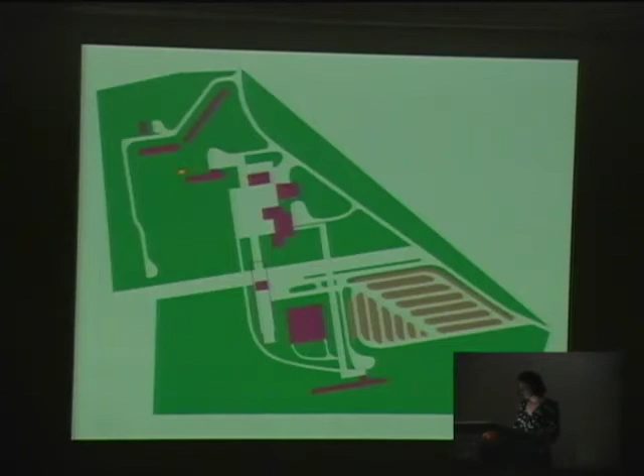What ended up happening, as in most of the built unités, is that the additional programs were truncated and only the housing bar was built.

A view from the building above before our intervention, and the same view after.

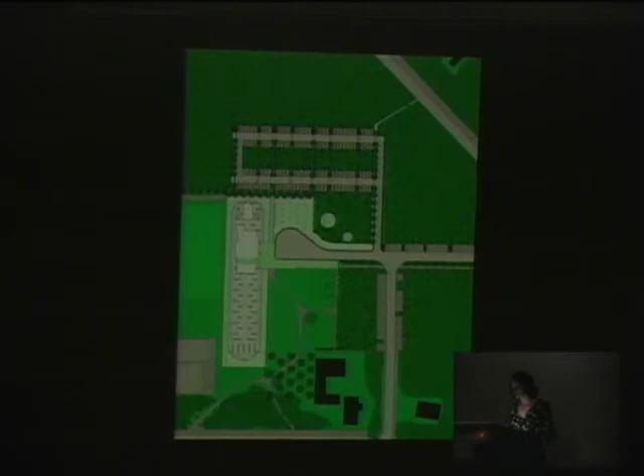In order to free the ground plane from the car, the parking was programmed into 2 long bands cut into the forest to the north of the building. A plaza was created as a transitional public space between the parking and entrance. A lawn took the place of the old parking lot. An orchard was planted to anchor the southern end of the site.

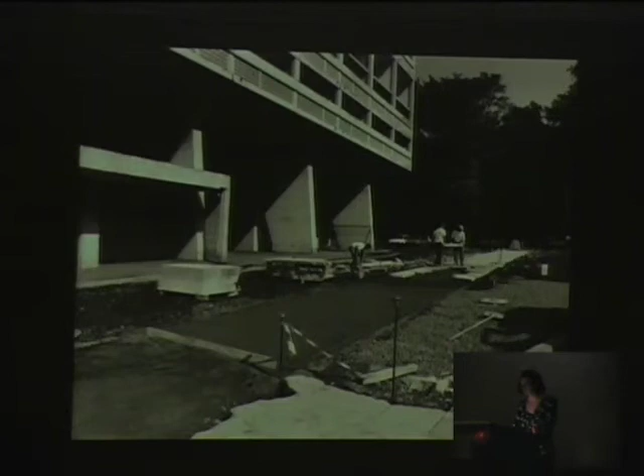These are some images of the construction process: the demolition of the existing parking lot, the grading and subsurface work for the new parking lot, the laying of the perforated pavers, facilitating infiltration, the subsurface work and laying of the stone paving on the main pedestrian connection to the parking, the prefabricated concrete bollards, which are in fact simply poured into traffic cones, the laying of borders, bollards, and lighting in the plaza.

The lighting and resurfacing of the underbelly of the building, the slabs of stone for the surfacing of the main pedestrian ways.

This is the circulation plan. It shows the vehicular circulation, access road, turnaround, and parking. The pedestrian surfaces of the plaza, the two principal perpendicular alleys, the zone under the building, and the paths across the garden.

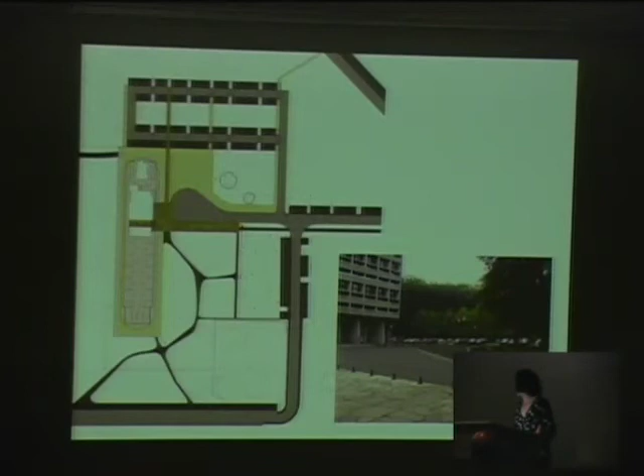This shows the circulation strip in asphalt and the parking bands in perforated paver.

This is the lighting plan. The parking is lit with a broad ceiling of lamps. The new plaza inversely is floor lit by embedded lamps laid in a grid distorted by the bulge of the turnaround.

The main access road is lit by street lamps up to the threshold of the parking entry road. Then low indirect pedestrian lighting takes over from floor projectors placed under benches. The elevator core, with its low relief indicating the main entrance, is lit from the ground, as is the underbelly.

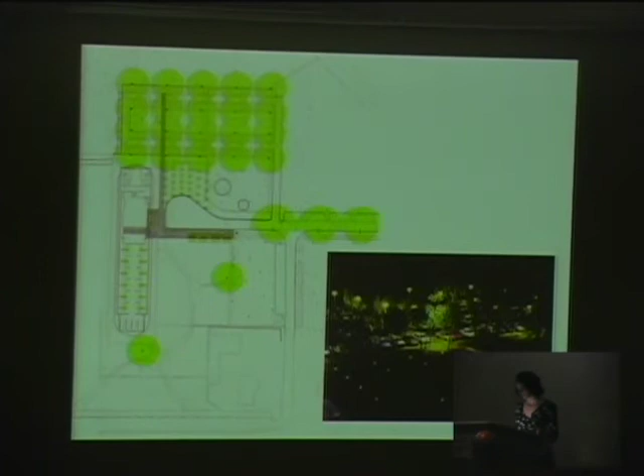Two standing lamps mark path junctures in the garden. Here we see the lit ceiling juxtaposed with the lit floor plane.

For the choice of standing lamp fixture, we dug up the model which Le Corbusier himself had specified. The company Eclatec was still producing this model, but just about to retire it, and they couldn't understand why we would want something so outdated.

The transition from vehicular street lighting to pedestrian indirect floor lighting. The inclinations of the planes under the bench was studied so that they would act as diffusers to shed light as far as possible across the floor.

This is the planting plan. In order to preserve the vitality of the beech forest, we proposed that 1,500 beech of diverse ages be underplanted within the mature but partially decaying canopy, so as to perpetuate its character.

Unfortunately, this part was significantly cut back as the foresters determined that the maintenance of the forest was of their register, not ours. They advocated underplanting of only seedlings of diverse species in the clearings created by fallen trees, bringing about a move away from the beech monoculture planted over 80 years ago.

Other than this, the planting scheme remains very sober: a double row of plane trees facing the plaza, 5 modest planting beds of aromatics and bulbs, a freestanding tulip tree in the lawn, and the apple orchard in a prairie to the south.

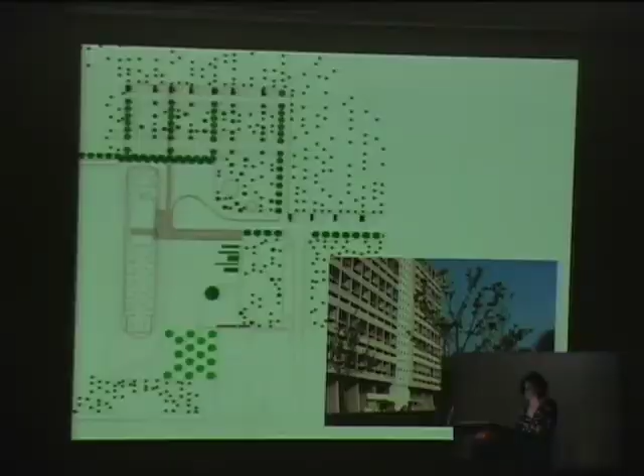The bulbs in the strip between the parking bands, the poppy prairie at the foot of the orchard, and the 5 planting beds of aromatics and bulbs, which unfortunately have been erased as their maintenance was considered too much of a burden, despite their modesty.

Here we see the double row of plane trees as a transition from forest to plaza.

These images show the site in wintertime.

This project was an eye-opener for us in more ways than one. It was essential to conceive of the appropriate foreground for such an icon, strong enough to hold the building, yet discreet enough not to rival it, balancing between those opposites.

We collaborated with a pure and true academic, and the association with a local engineer proved extremely difficult, reinforcing the need to choose our battles.

But we did have our insider advocate in the right-hand man to the mayor, who had grown up in the building as a child and was determined to see the project through.